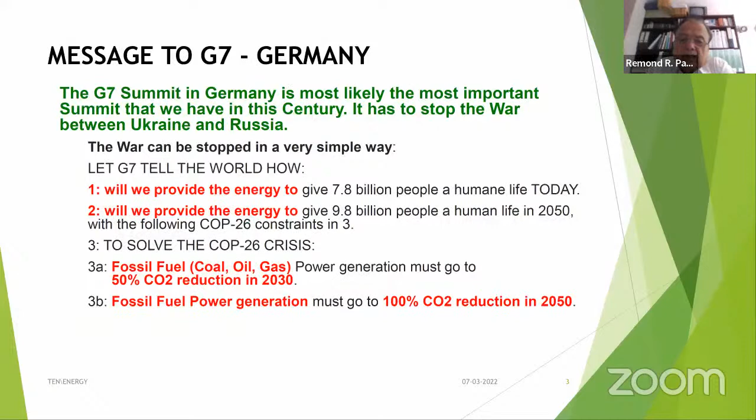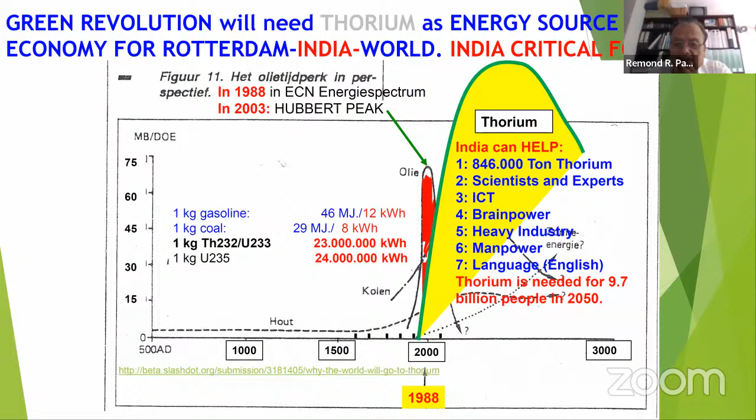I think the next slide is for Indonesia. Yeah, number 8 - even India does not have number 8. You have it, and I think you must use it to the maximum. If people from the scientific group of Batan and other organizations of Indonesia want to work with us, please, let's do it together. But as you see, only India and Indonesia have these two qualities, number 1 and number 8, which are very important for the new fuel of the future. That's why my focus is on India and Indonesia.

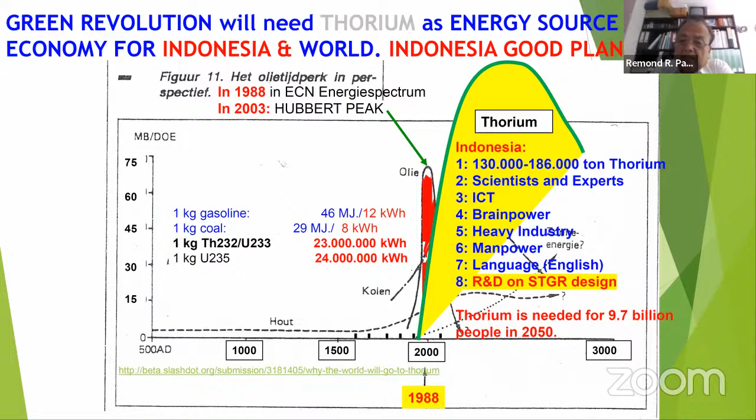This was published in May, showing that nobody is doing anything to stay within the 1.5 degrees Celsius limit. All the countries that promised something are not doing what they promised. So if we are not doing anything, I think we will end up like the next slide.

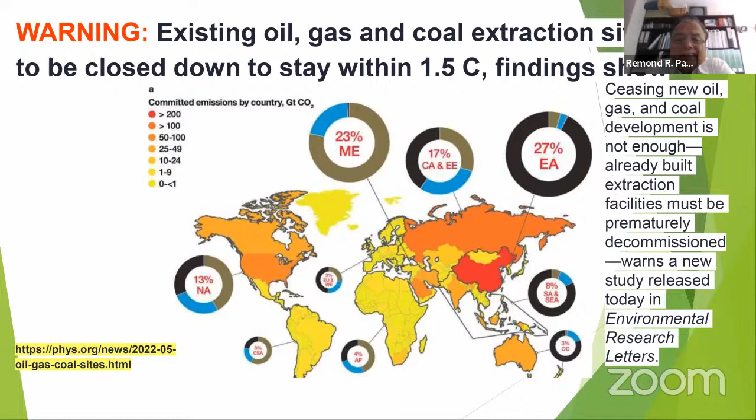This slide is from 1989, from a publication of the UK Atomic Energy Authority in the magazine Atom. You see all the red colored parts will be flooded in 2088. The dark places will be new deserts, and we'll have over 9.8 billion people on the planet to live. This is a very disturbing picture, but we are not doing anything to stop global warming, so we have to work very fast with very good solutions to stop this type of development.

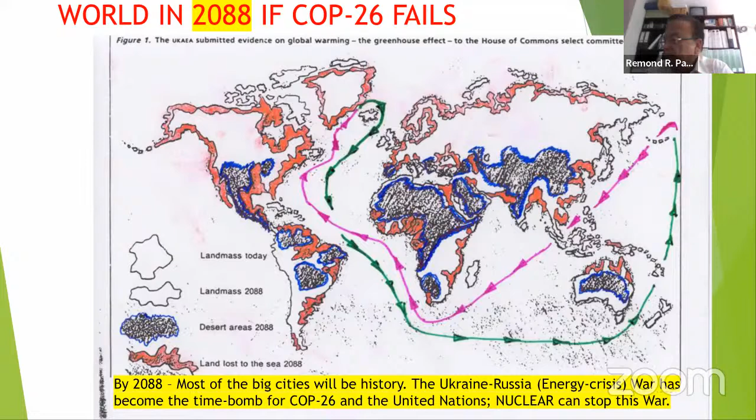I found this on the internet, showing how our energy market looks at the moment. For electricity, we have 2,200 gigawatts of coal. I think converting the coal is the easiest way to try to meet the 1.5 degrees Celsius target, because within 3 years we can convert a whole coal-fired plant - you only have to replace the boiler and use the same plant. That's why I say for Indonesia this is an ideal solution. We have to look at it, and if Indonesia wants it, we have to start as quickly as possible.

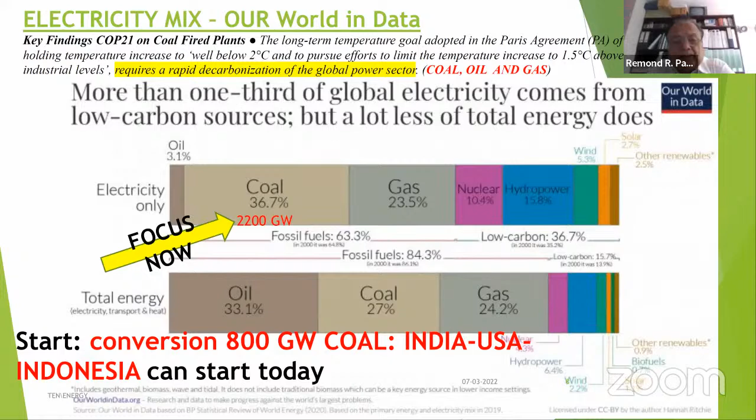Because suddenly everybody started opening coal-fired plants again, I had to say something: listen, the HTGR is not to improve your environment or for CO2 reduction. It's the economics that make the HTGR the best solution. The environmental benefits are just a bonus you get, but since the environment is so important nowadays, we use that also to promote our technology. But our technology is not for the environment, it is for the economics, and the other things just come with it.

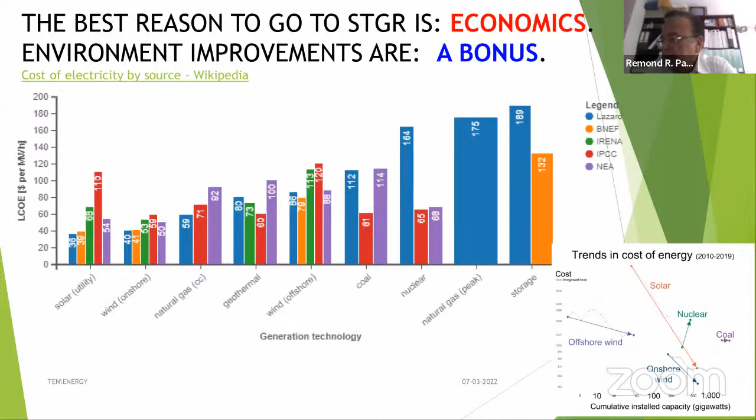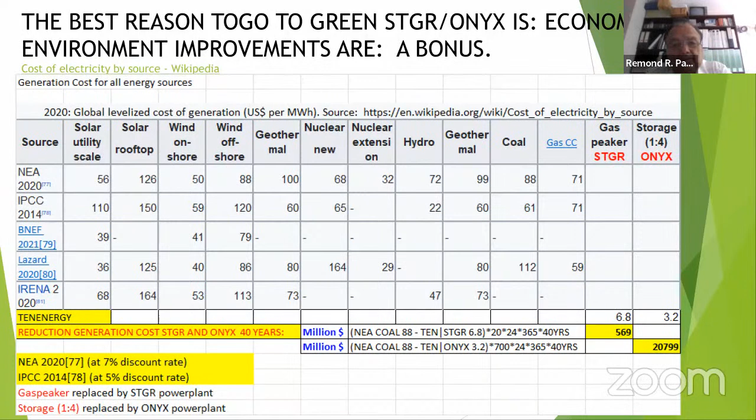This was written about selecting a new technology - you have to take this into consideration. I haven't gone into detail, but the blue items indicate what you all have to look at when you go to another technology. I think we are in very good shape when you look at all these conditions mentioned here. The last red line is quite disturbing, but I didn't write it - it was just like this on the internet. Take your time in a later phase to look at what is important. But for us, this isn't important because we comply with most of the criteria, and these problems aren't relevant for our technology.

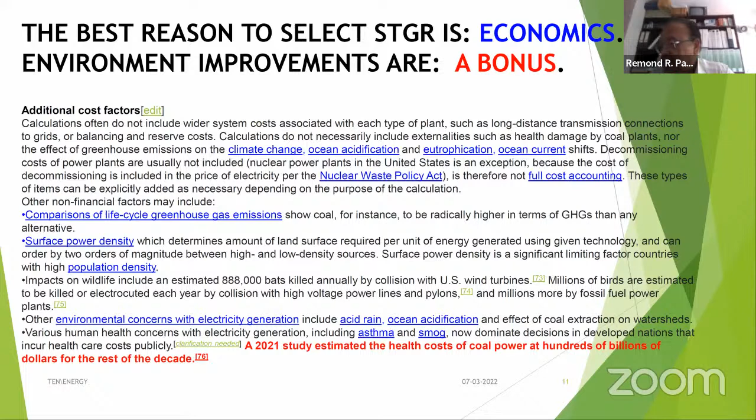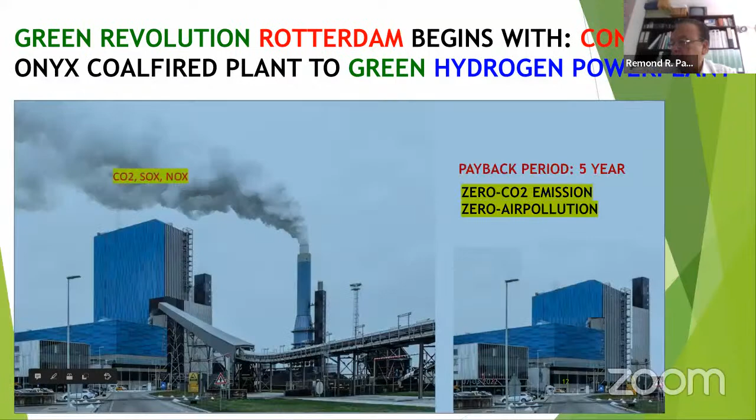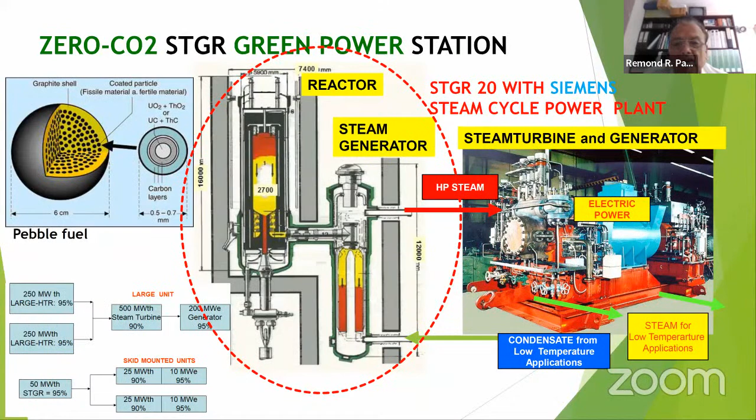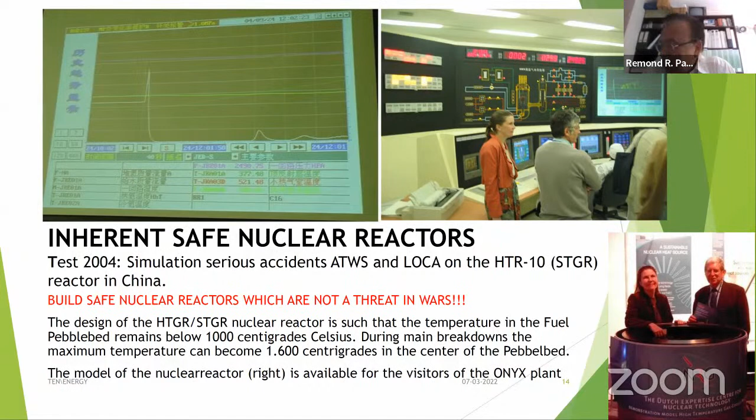This is in 2008. Our Prime Minister went to Tsinghua University, where he gave a lecture on energy systems for the future. You see the test again there, and in the picture we have 2 of our professors from Delft standing there, Professor Tim van der Hagen and Professor Jan-Leen Kloosterman. Tim van der Hagen is the boss, and Jan-Leen Kloosterman is the fuel expert from the university. They were in 2008 together with the Prime Minister in Indonesia, in China.

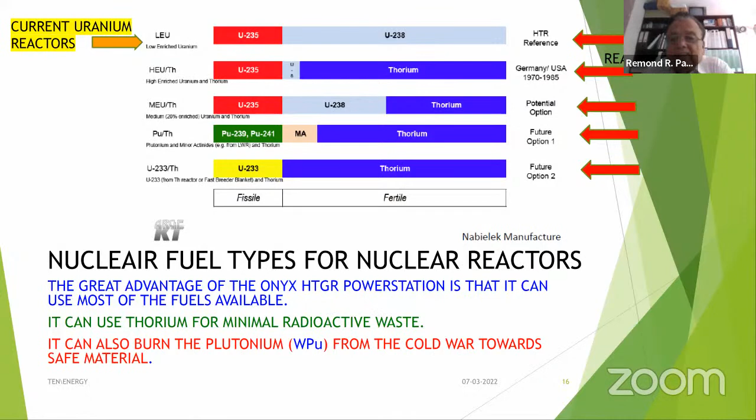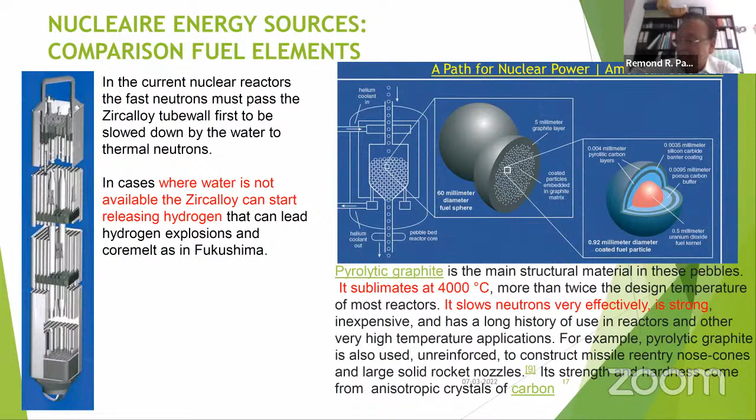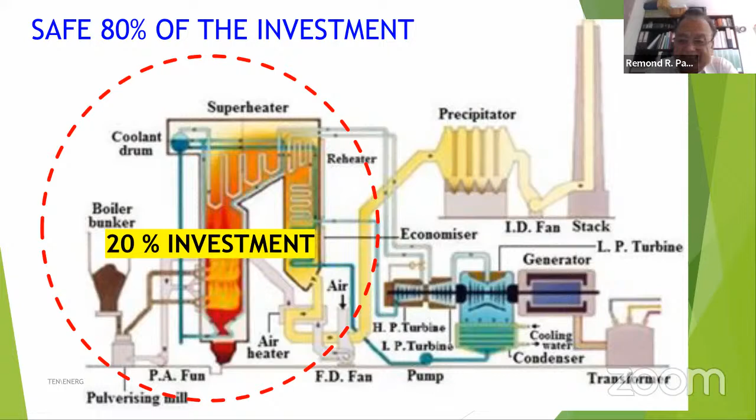This is the nuclear version of the same picture. I put the nuclear island in to replace the boiler, showing the advantages of no CO2 emission, no SOx, no NOx. Since it's a high temperature gas cooled reactor, we want to use minimum cooling water. We don't want to use cooling water, but we want to make drinking water or pure water with it. We also have the opportunity, with the high temperature, to go to high temperature hydrogen electrolysis. These are advantages that come with this high temperature reactor, where it's better than current light water reactors, which operate at low temperature, while here we operate at high temperature.

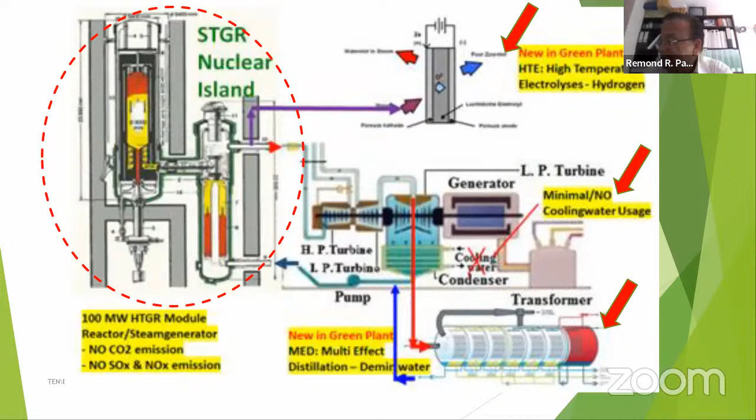This is where I compared solar and wind energy systems with our system. This was the main picture we showed at the World Hydrogen Energy Summit, showing why our system is the greenest one, and they gave us the prize for that. These are two compared systems which, if they don't have good systems, will probably have to close down. These systems will not comply in 2050 with the COP26 conference, because they still have a fossil fuel component, and we don't have that.

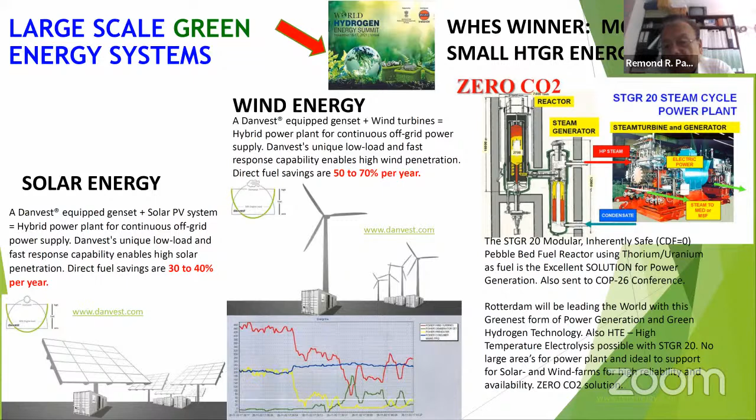In India, they asked me to make a comparison of the cost. This shows the cost — it was made for the Netherlands, where you see the cost of several power generation systems compared to the STGR and the converted coal-fired plant. The last one is the coal-fired plant. You see that the modern systems cannot compete with these two, the STGR and the coal-to-STGR conversion. Also the hydrogen production cost is lower with our system. So this is what we are promoting now in the Netherlands: look at the generation cost of the plant, and look at the cost of hydrogen.

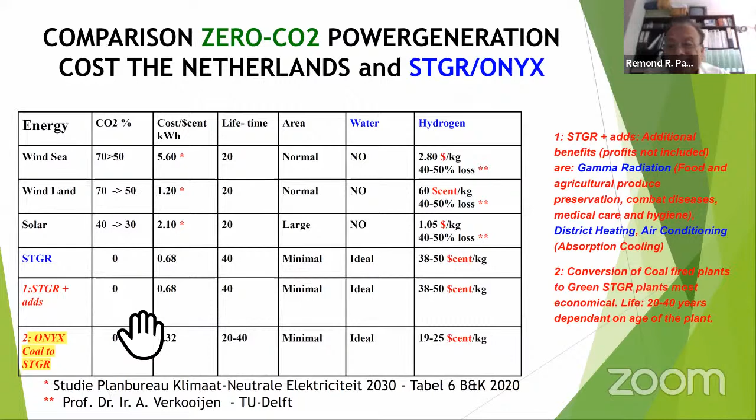In India, they asked me to compare the light water reactor and heavy water reactors with the STGR. This isn't a detailed comparison, but you can say economically all three are attractive. The cost of the light water reactors, to my knowledge, is 8 million per megawatt, and the complete STGR is 4.5 million per megawatt. Financing will be quite difficult for the light water reactors and advanced heavy water reactors, but I think for the STGR, with a core damage frequency of 0, you'll get financing more easily.

In deregulation markets, the big plants have problems, but the small plant can be placed anywhere and can compete. Liberalization has the same problem. The power grid, with the STGR, you just put it in the local grid. But for the big reactors, you will have to develop a high voltage grid, and you will have to put them at remote locations, while the STGR can be put in the local grid, so you get more benefit of nuclear energy.

For hydrogen, the STGR can go to both high pressure electrolysis and high temperature electrolysis, and that is an advantage. The core damage frequency is a problem for many countries, but we don't have that problem because we don't have core damage. And the last point, the economics, the last line I don't see.

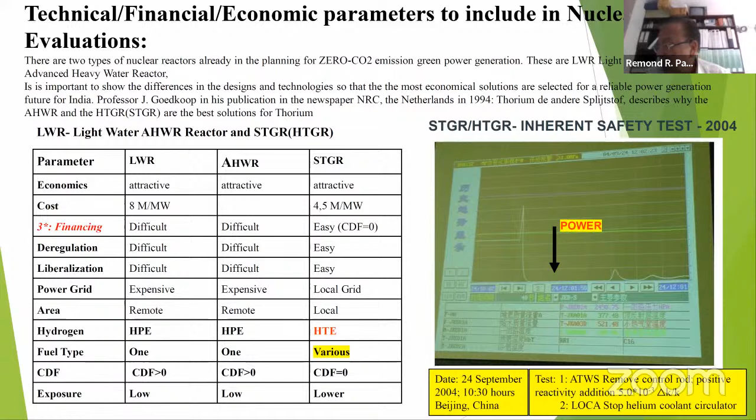People here in Holland wanted to see who is all involved in Ten Energy International and who is doing what, so we made this sketch. I started Ten Energy. We have a business development group, we have an advisory group. They are not working for us, but we are in good contact with them and they have promised to help us. If people from Indonesia want to join or work with us, it will be most welcome, because the more people work on it, the better.

We are in a critical time in the world, and we have to try to convince people that nuclear energy is a good option. We can convince them best if we provide an absolute safe option. All the reactors are fine, but what we can tell people is that the high temperature gas cooled reactor is a safe reactor. I have this from... I went to... sorry, I'll show it later.

To build nuclear power plants, you need a big consortium. For power stations on land, we want RRI-International from Germany to do the design, engineering, and project management on land. And we want Damen Shipyard to do the design, engineering, and operation of barge-mounted units. So we have two columns: one for STGR on land and one for STGR barge-mounted. We think barge-mounted reactors will be the most important in the future because they can directly produce water out of brackish water or seawater.

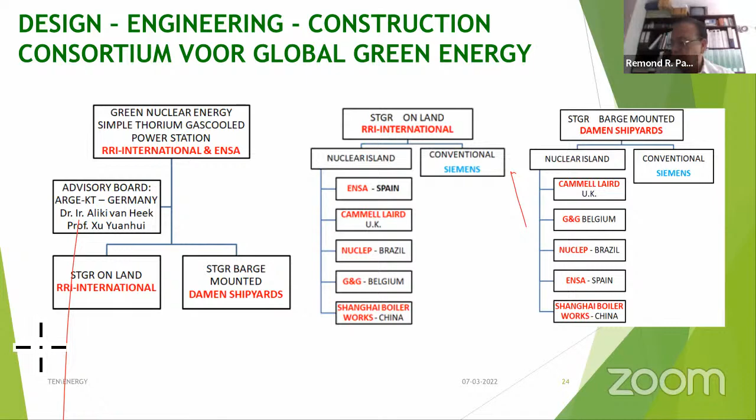So this is what we want to do in Rotterdam, and we want to convince the Rotterdam Harbor people that they should go with us, because the other solution now being developed with hydrogen from sea wind energy, I think is not the right way to go. It will be expensive. And with this plant in Rotterdam, we can produce...

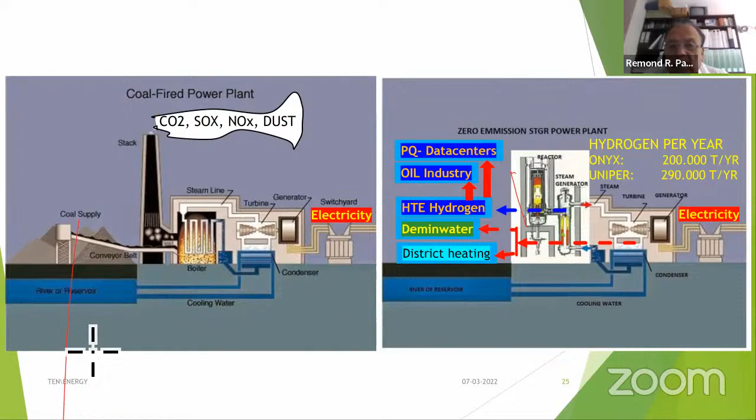Sorry, yeah, this is the financial analysis of the plant in Rotterdam. So if we convert the plant, the Onyx plant, we can produce hydrogen for 48 cents per kg with high pressure electrolysis, and 30 cents per kg with high temperature electrolysis.

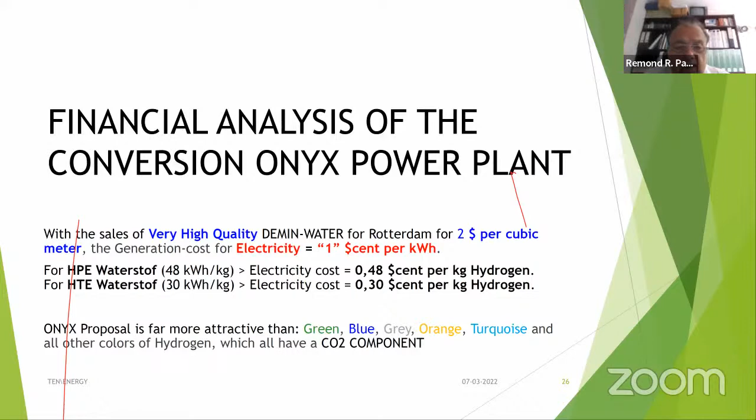These are some of the benefits I made for the Netherlands. In the Netherlands they have plans to build 2 large EPR reactors, which will cost 25 billion euros. If we convert the 4 coal-fired plants in the Netherlands, it will cost 6 billion, and the 4 coal-fired plants will produce more power than the 2 new EPR reactors from France.

And we have no losses, because a power plant is not a plant on its own - a whole society is around it. If the plant can be converted, everything will stay the same, the economy will be the same. So you save a lot of the existing social infrastructure, aside from the power infrastructure. The conversion of the Onyx power plant will be breaking news, because till today we are the only one proposing this. I have not seen anybody else come up with the idea to convert coal-fired plants. If we could do this, it will be news for the world.

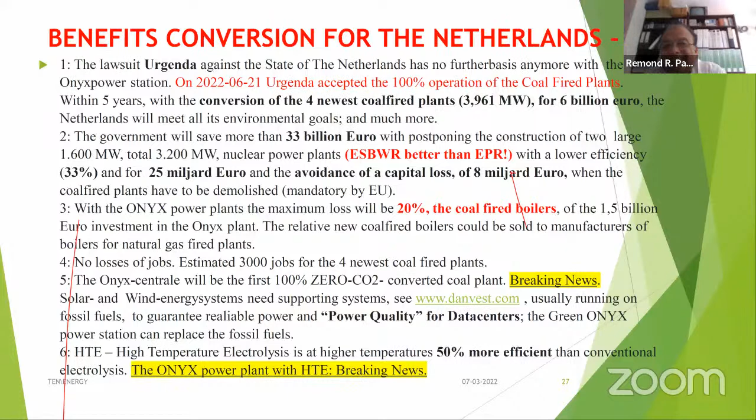These are the 4 plants which we can convert, and we can save a lot of money for the Netherlands. As I mentioned, Rotterdam is a huge energy eater. We can start in Rotterdam and demonstrate all the advantages of power conversion from nuclear to heat and so on. We also have the large greenhouse complex, Westland. They are also supporting our idea, because they want a lot of power and heat from this power plant.

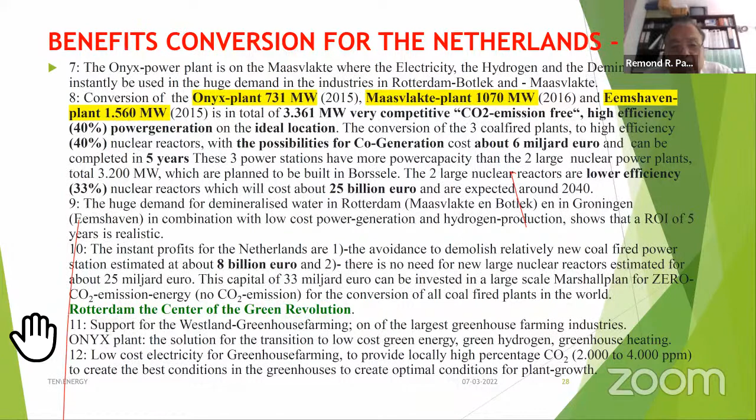Okay, the last thing is very important. The greenhouses, we want to support them with electricity and also produce CO2 for them, because we have to go to 400 ppm, maximum CO2 in the atmosphere, but in the greenhouses it is 2000 to 4000 ppm to get the best conditions in the greenhouse. So these things we should not forget when we look at solutions.

And the converted plant can do more things than the coal plant. The coal plant at this moment only provides electricity, and we can provide steam, heat, and gamma rays radiation sources. And because of the steam, we can do electricity, hydrogen, and ship propulsion. Ship propulsion I will show later.

But one of the important things might be that we have to do research on how to use gamma radiation to clean our spaces where we live, because Corona has shown us that we need clean air to survive in closed spaces. And maybe we can use the used pebbles as gamma source for cleaning the air. Next, please.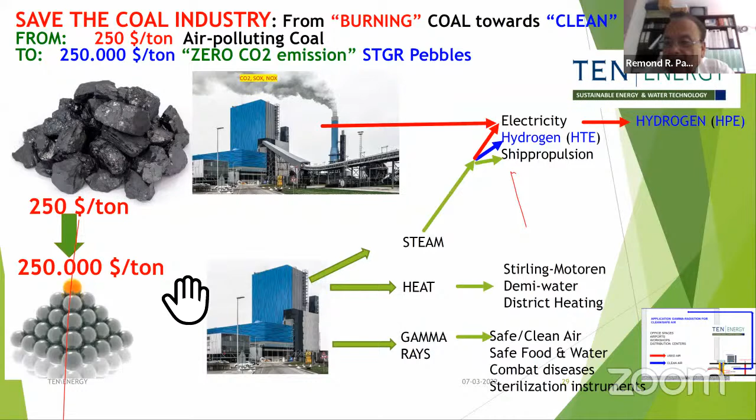Yeah, you see all the components. So the coal industry will have a revival to a better and clean industry, whereby all these components have to be made. The pebbles, the structure components, the wall of the reactor, the inner wall of the reactor, all these are high added value products out of coal. Next, please.

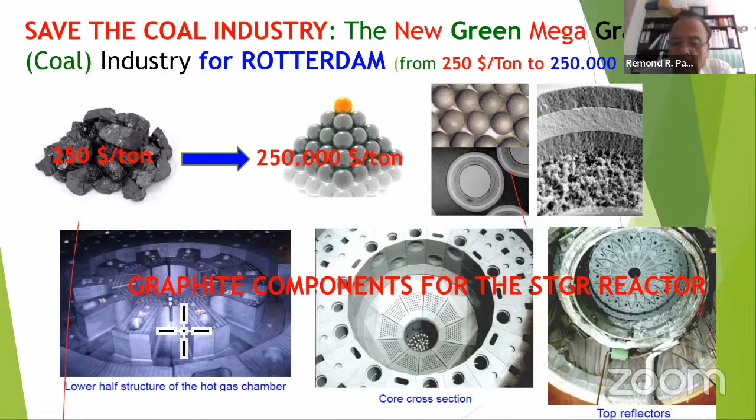Yeah, the global green revolution starts. Next, please. I want to show you all this. Sometimes people say, yeah, it is not proven technology, but for me this is proven technology, because the AVR started from 1966 till 1988. The THTR, the thorium high temperature reactor, I also visited this plant. It was a very nice plant. Well, unfortunately, it was closed after Chernobyl.

Then the Chinese came with the HTR-10, and we are proposing STGR-20. The Chinese took the HTR-PM200, which is actually the German HTR module reactor. The Germans helped them to develop that. And new developments are that America is copying the German design as a XE100 USA, and UK is doing the same. The UK has joined USA to do the same, and the Chinese are even planning a 600 megawatt high temperature reactor, whereby they will put 6 steam nuclear islands in one reactor building. That is the right bottom picture.

So all this is for me sufficient information to say this is a proven technology. We don't have to invent the wheel. We just use what is invented already, since the Germans made it with the HTR module reactor. And let's start as soon as possible, as quick as possible. Next, please.

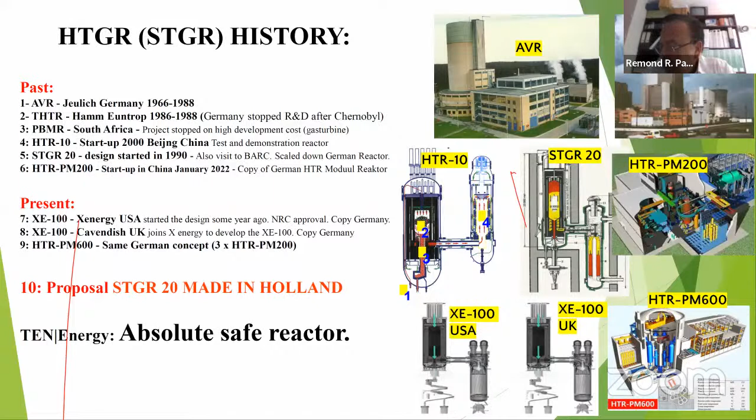Yeah, with the green revolution comes a lot more. Not only is everybody talking about green hydrogen, but first we need a global Marshall Plan to convert the existing coal-fired plants to green plants, and then we can also at the same time build new plants. But the conversion of the coal-fired plant is one step, but these small STGR reactors can work very fine with wind parks.

There is a thesis from Professor Verkooyen and Dr. Brian Boer. I can send that if people need it. It shows how you can make these small HTRs work with wind parks to create stable, reliable power.

Same for solar parks. But also the cement industry, the steel industry, the ammonia industry, and the aluminum industry can benefit from this new technology. I worked in the aluminum industry, so I have developed a plan to produce aluminum for $1,000 a ton. And if somebody wants that report, I can forward it also. But all these industries can go green now if you have hydrogen. But the hydrogen must be cheap, otherwise it doesn't make sense.

Next, please. I here put some industries together with coal and pebbles, to show what will happen in the Netherlands when we want to go to Dutch zero-emission industry. All these industries can benefit from the STGR reactor with zero emission, with hydrogen, and with cheap electricity.

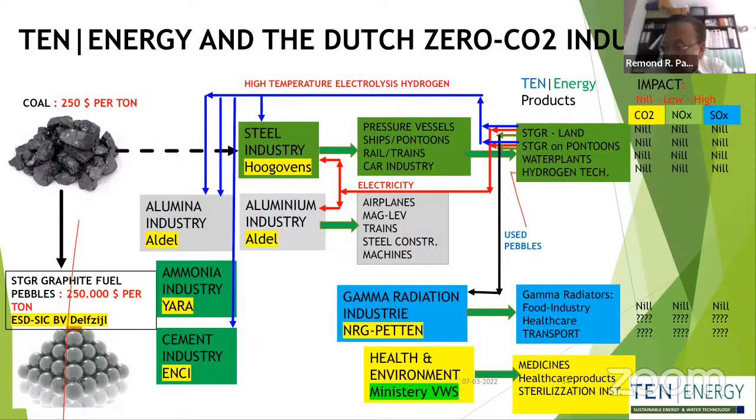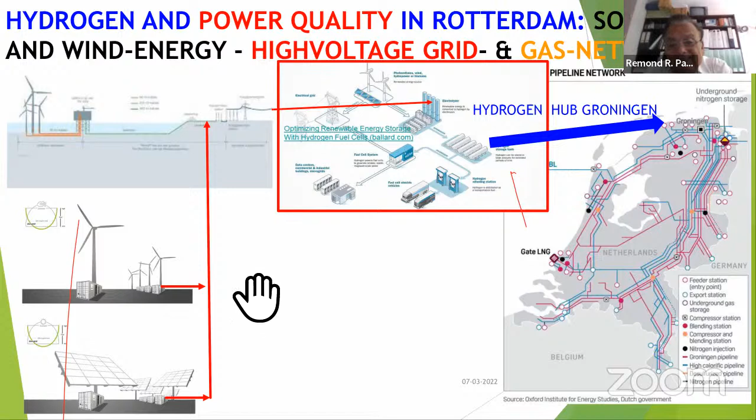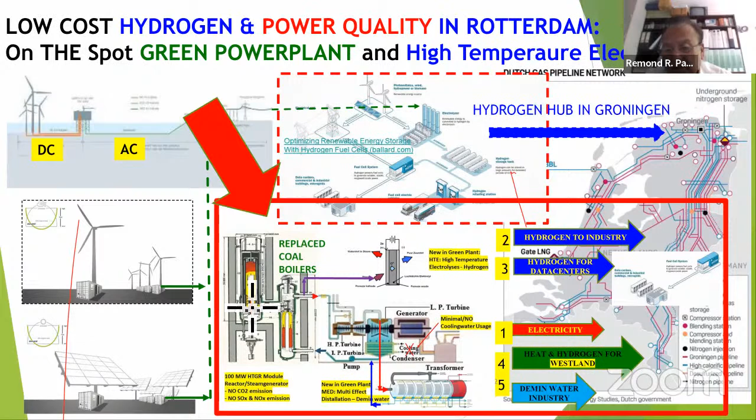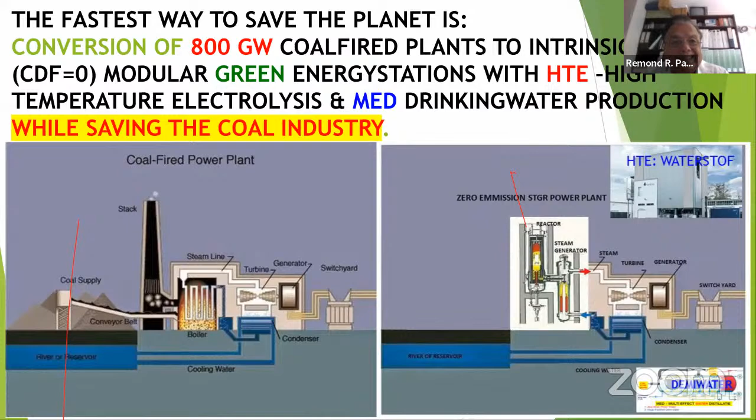This is how you can combine our technology with the wind parks and hydrogen. This can be done very simply; it is not complicated. Here we use the high temperature electrolyzers from ITM.

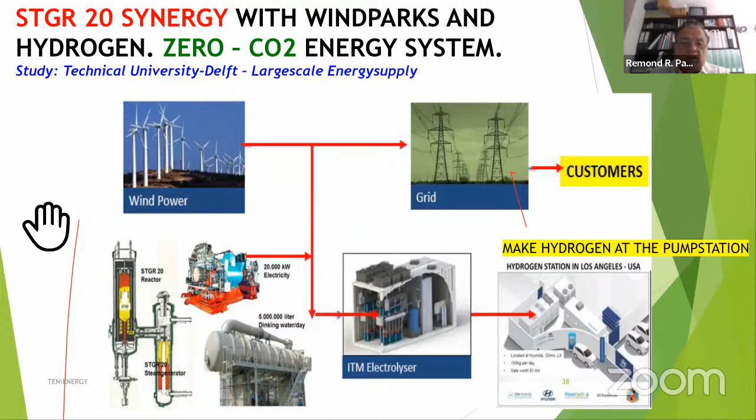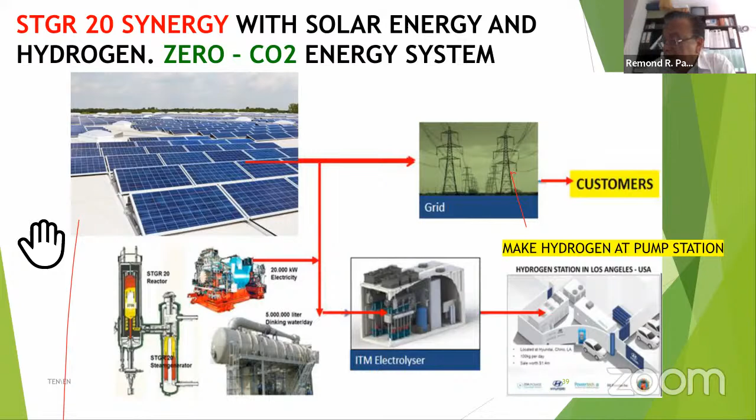For solar, the same. You can do the same. Instead of wind, you can support the solar systems also to become reliable power.

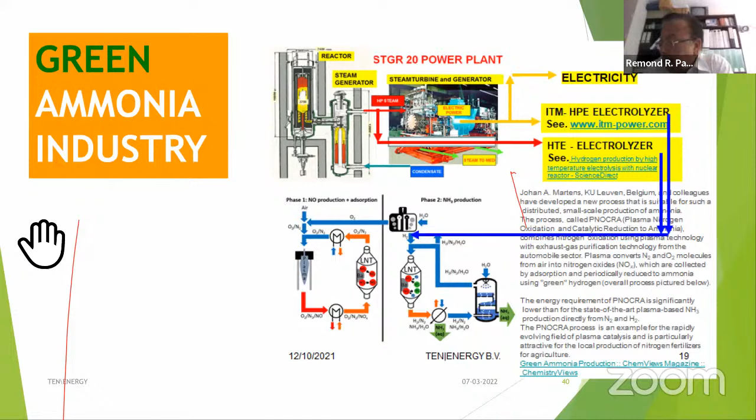We can use the STGR also to produce low-cost ammonia. The technology here is called PNOCRA, developed by Leuven University in Belgium, to make small green ammonia units. I've put the website there where you can see the information on this technology. So this is one option which we could look at. The next slide shows something more, I think.

We have two problems in the Netherlands: a CO2 problem, and an ammonia problem because of too much cattle, cow, pig, and chicken manure—it's a big problem. But if the cattle is making the ammonia for us already, we'll make savings in the Haber-Bosch process. And if we use CO2 out of the atmosphere, we make in a very nice way a lot of fertilizer, which will be needed very much to feed 9.8 billion people in 2050. I don't know why these two things are overlooked in government policy, but these are two simple ways to solve the ammonia problem and the CO2 problem, because we can make something very good with it.

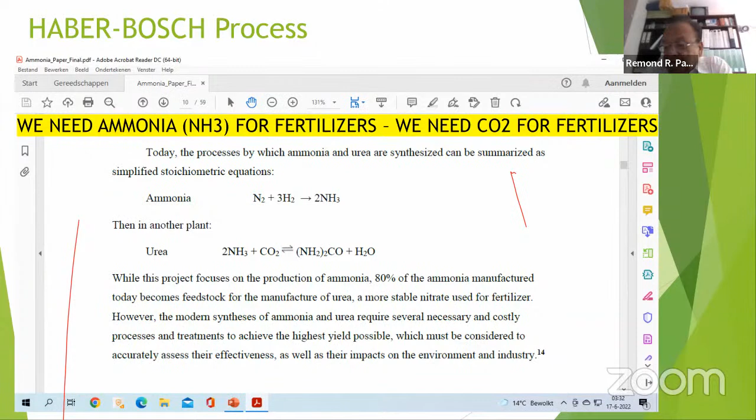This is a big picture of the Belgian invention. But as I told you, I think the ammonia can also be made in collaboration with farmers, where you remove the water and ammonia from the manure—those technologies have been developed in the Netherlands. So that is not rocket science; it is already known.

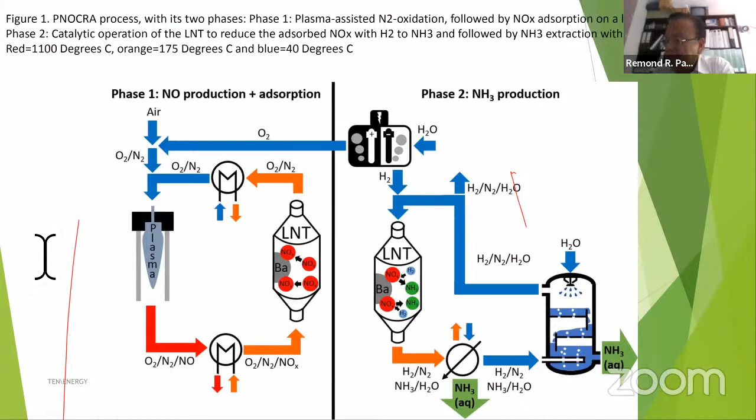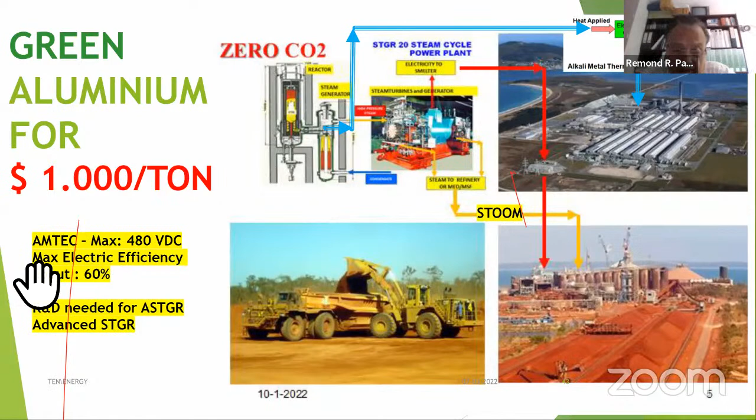This is green aluminum. I worked for Alcoa, Aluminum Company of America, in Suriname. My feeling is that if we put the STGR on the bauxite deposits, you can make aluminum for $1,000 a ton, because you eliminate the transportation. Bauxite transportation is terrible, especially in the rainy seasons, and transportation of alumina is also a headache. So if you put the STGR with the refinery and smelter on the bauxite deposit, you can produce aluminum for $1,000 a ton. I have a report on that, so if you want it, I can send it to you.

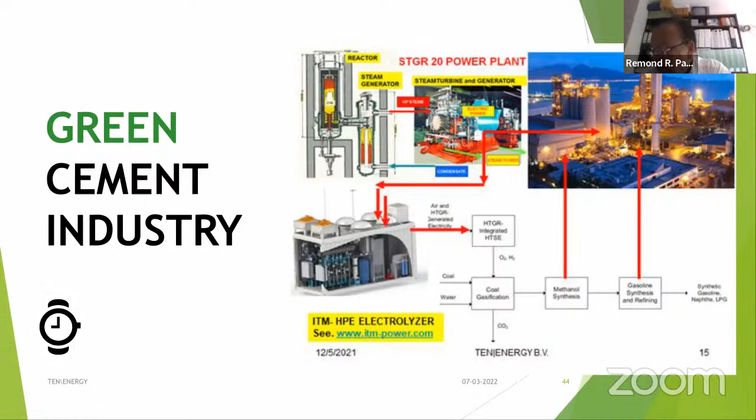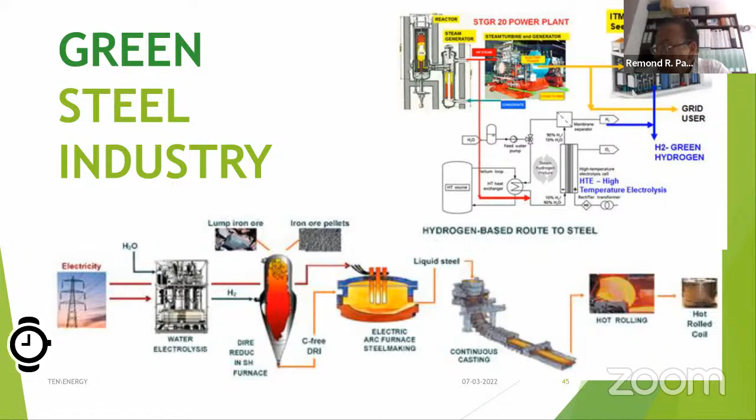You could use the STGR instead of the big diesel engines, which are diesel and bunker C fuel engines, which are polluting the world in a terrible way. They say that 16 of the big ships pollute the world more than all the cars in the world. You can see that publication on internet. And if we do this, we have a zero emission system.

And if we can build this technology at Kendal in a new shipyard, it would be ideal. We have talked with Damen shipyard here to do it. And also in the north, we have Conoship that is looking at hydrogen propulsion. So we can combine steam generation propulsion with zero emission or hydrogen propulsion. Both things are looked at in the Netherlands, and we could combine that in a shipyard on Java.

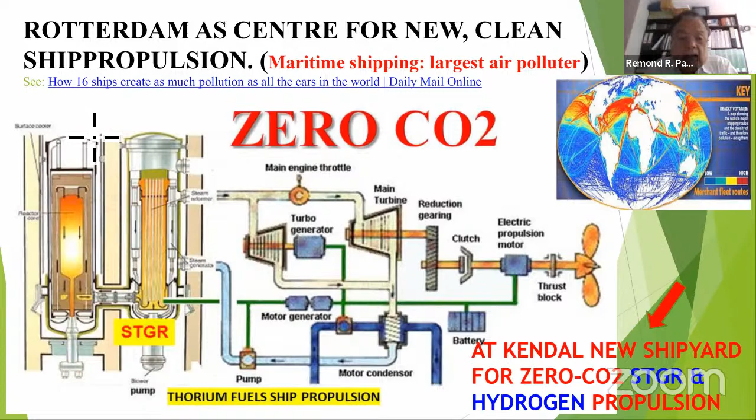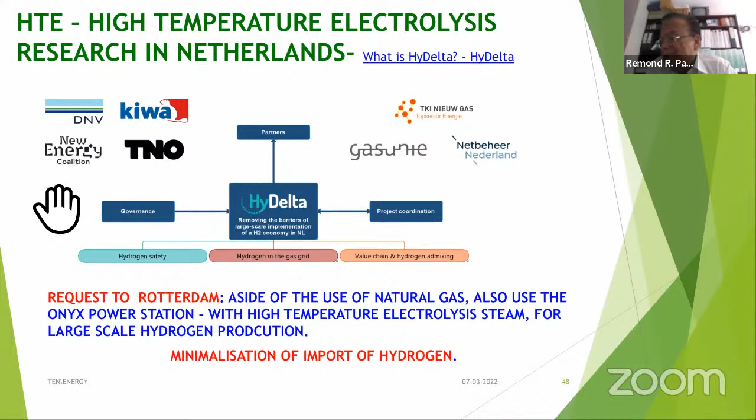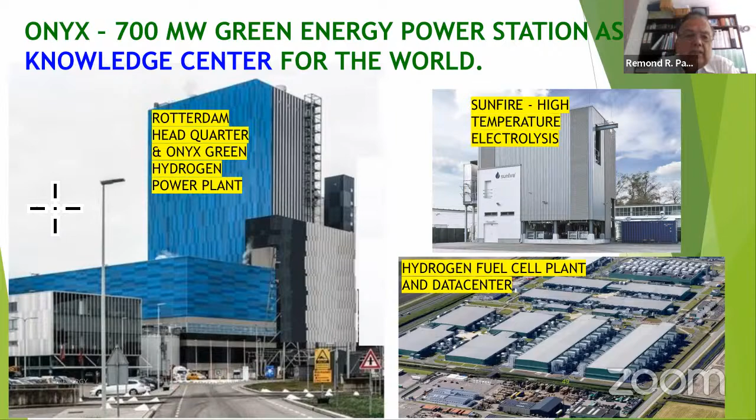And if you have questions, please let me know.

Yeah, thank you very much, Dr. Remond. It's very interesting to learn many things from you about your idea to change the coal power plant, the Onyx, into STGR. Well, the STGR is the abbreviation of small thorium.